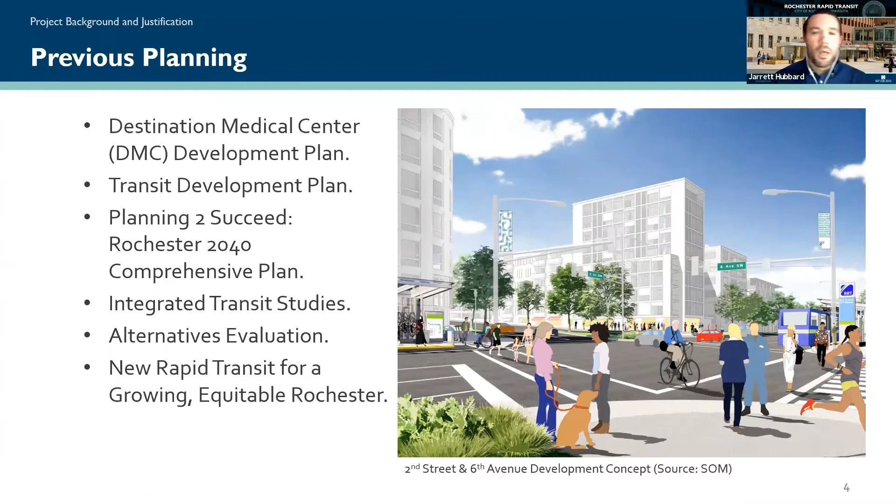Let's take a step back and look at what some of those documents, particularly the integrated transit study in 2016, 2017, and the DMC development plan from 2015, really showed about what would happen to downtown in our community as traffic and more employees started to come into downtown. We have to start with the idea that we're going to expect up to 30,000 new employees by 2040, and up to 4,000 to 5,000 new residents living in downtown.

So what does that mean and what does that look like in our downtown, in our community? Well, the first thing is, as we'll see later tonight, our streets will be congested with all these additional people trying to drive downtown, particularly in their single occupancy vehicles or personal vehicles.

One of the first things those documents outlined was we need to get people out of their personal vehicles and into other modes, with a heavy preference for public transit, but all other modes too. Additionally, if all those people are driving downtown, that means a lot of new parking spaces that would be expensive to design and build, and taking up valuable land downtown for people to park their cars during the day.

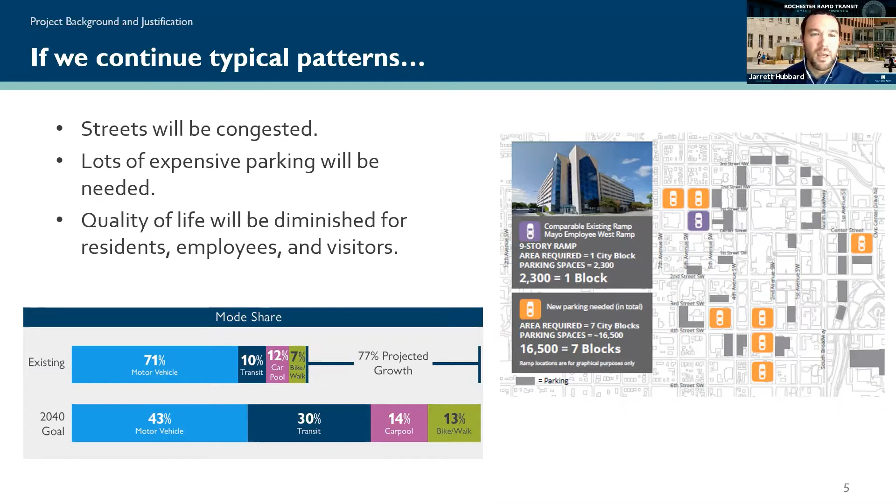And then finally, we can talk about quality of life in many different aspects of all this growth happening. Specifically, additional traffic and parking, where there would be limited parking for residents and patients trying to get downtown, find parking spaces, and move around downtown.

Back in late 2019, the Rochester City Council chose the mode of bus rapid transit, or BRT, as the primary mode to help bring individuals into downtown. What does bus rapid transit provide us? It provides a superior passenger experience with high frequency and high demand. It improves capacity, with larger buses that even with COVID restrictions could still carry up to 60 or 75 people per bus, helping with that switch of getting people out of their cars into other modes.

But we have to remember that transit and the development of Rochester Rapid Transit is just one element of trying to accommodate that growth and get additional people downtown. Additional things the city of Rochester is considering include looking at our parking policies and how we go about that.

That would include the development of even more parking and park-and-ride lots similar to the IBM lot further outside of town, and moving people via pedestrian or bike modes, such as developing the concept of City Loop.

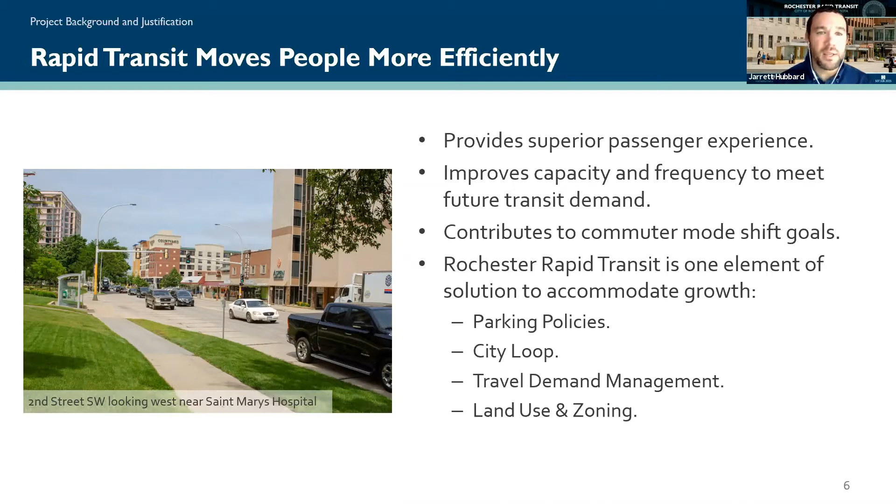So coming out of this, what do we get from bus rapid transit, or BRT? We get long-term investment in sustainable transportation. What we mean by this is, one, it's sustainable—we're talking about using electric vehicles—and two, as I mentioned, for over a decade now the city has been talking about trying to find additional ways to improve the level and types of transit offered.

Additionally, the permanence, or the ability to show that the route is stable and attractive, helps attract additional riders and will also attract additional economic development along the route. Really what I mean by this is development of platforms or stations more similar to what you see behind me downtown, or even more similar to the light rail transit you see in the Metro Twin Cities.

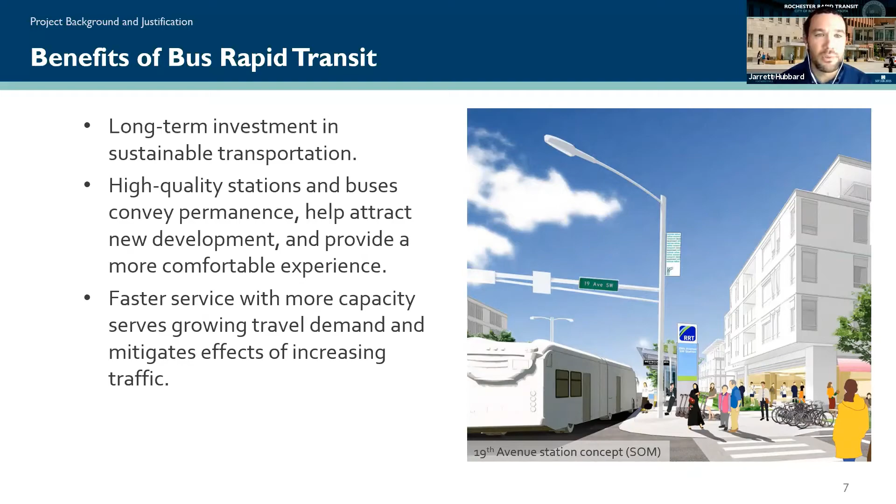Finally, we're talking about increasing service and capacity to help get those people into downtown. Once they're downtown, they can move more freely without having the need to get back to their car and move it from one parking structure to another. All right, let's move on.

Let's talk big picture about what the project includes. It is a 2.6 mile bus rapid transit system, or BRT line—we'll take a look at the map in a second. That includes 7 stations. We're also looking at the use of what are known as business access and transit lanes. I like to call them transit preferred lanes, because BAT lanes, for short, give preference to transit vehicles but will allow people to make right-hand turns out of them into driveways, accesses, and side streets, so they act as kind of a combo-type lane.

The project also includes the development of an enclosed, climate-controlled St. Mary's Transit Center, which would be across the street from St. Mary's along 2nd Street, and the development of a pedestrian tunnel underneath 2nd Street. As part of that tunnel, we would reconstruct 2nd Street from 11th to 16th Avenues, and we're looking at using 60-foot buses that have 3 doors and would be electric vehicles.

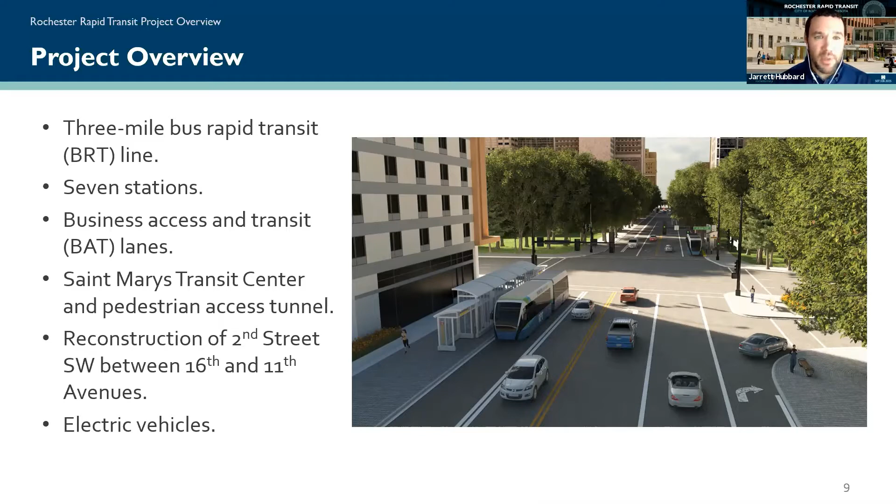So just real quickly, the type of service we're looking at: a bus would be coming to a station or platform every 5 minutes during the morning and evening rush hours, then every 10 to 15 minutes during the rest of the day and on weekends. It would take roughly 15 minutes to get from one end of the line to the other, with a low estimate of about 11,000 riders per day, with expanded service hours than we currently see with RPT neighborhood service.

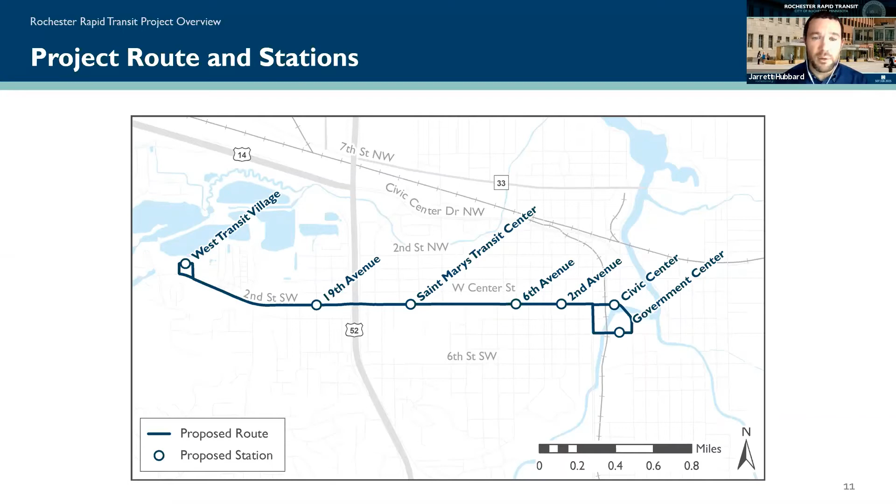Next is the map. As you can see, it stretches along 2nd Street. Starting on the west side, it would begin with what we're calling the West Transit Village, the location of Mayo's current west parking lot. Then you'd come down and stop at one of the 7 stations, or 6 stations after West Transit Village on 2nd Street, all the way to dead-ending at the Civic Center, then making a right-hand turn onto 3rd Avenue, followed by another right-hand turn onto 4th Street near the Government Center, followed by another right-hand turn on Broadway, and eventually a left-hand turn back on 2nd to come back out to the west. So with that, I'll pause and see if there's any questions.

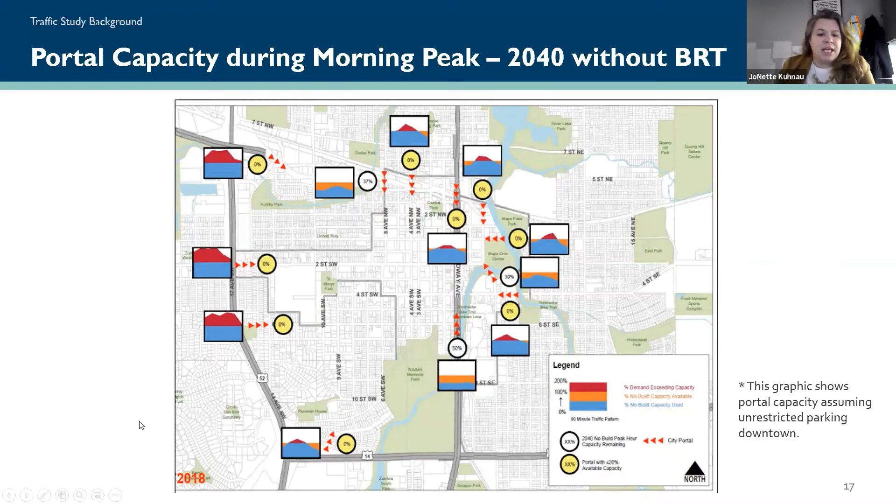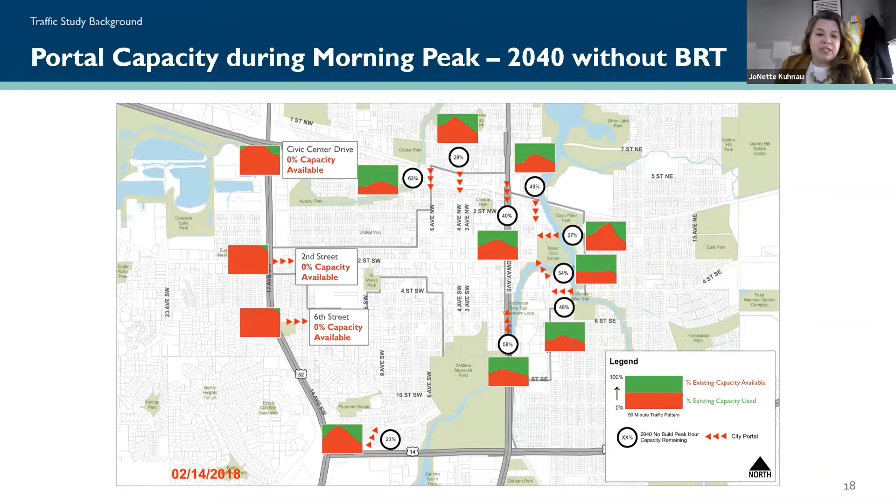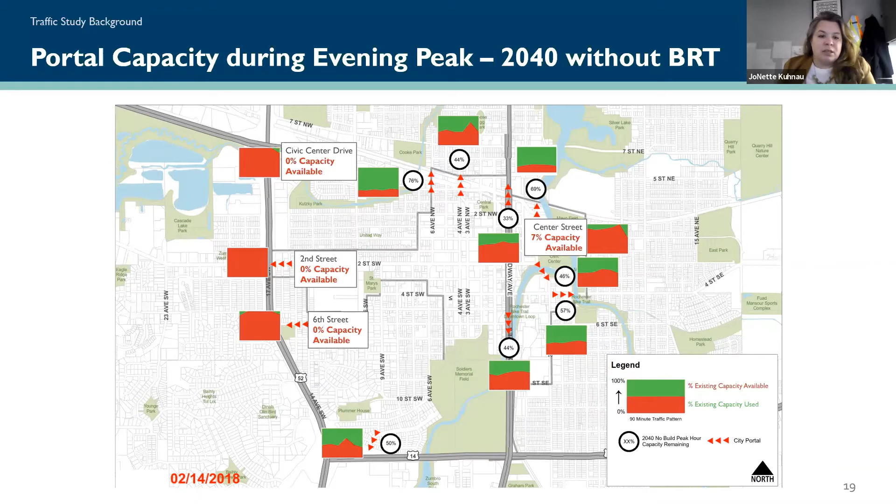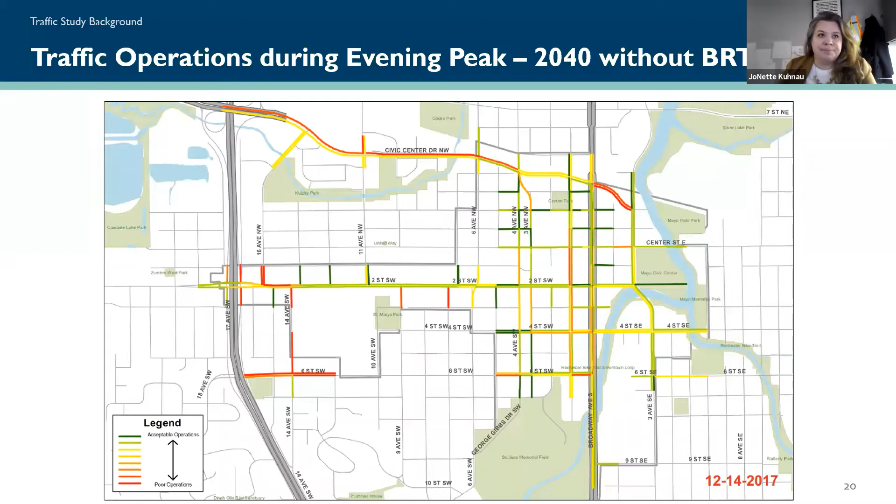So as we move into the current phase, the information I was just sharing was from the integrated transit studies in 2017, 2018. With this current traffic analysis, the purpose was to understand the effects of the proposed rapid transit project on the transportation system. That does two things: it informs the project design, resulting in modifications and refinements to make traffic flow better with the project.

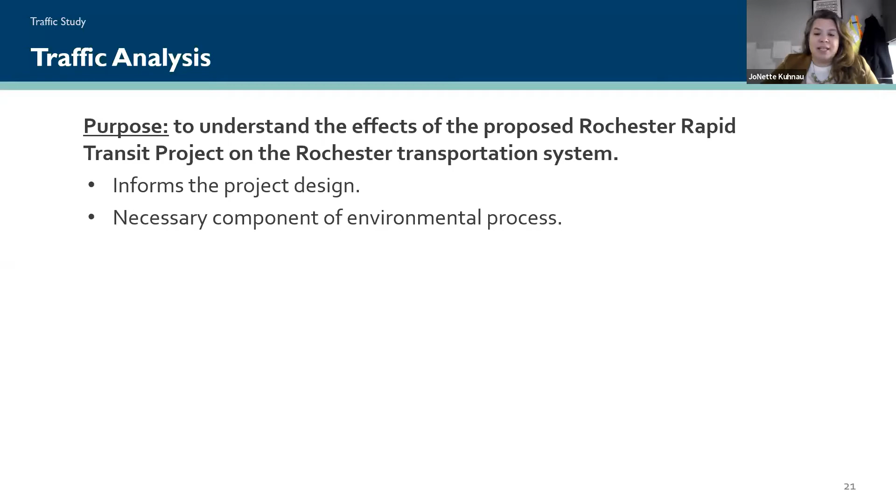And then it's about identifying and documenting any traffic impacts and deciding if there are any improvements that need to be made to mitigate those impacts. That is part of the environmental process that the project goes through.

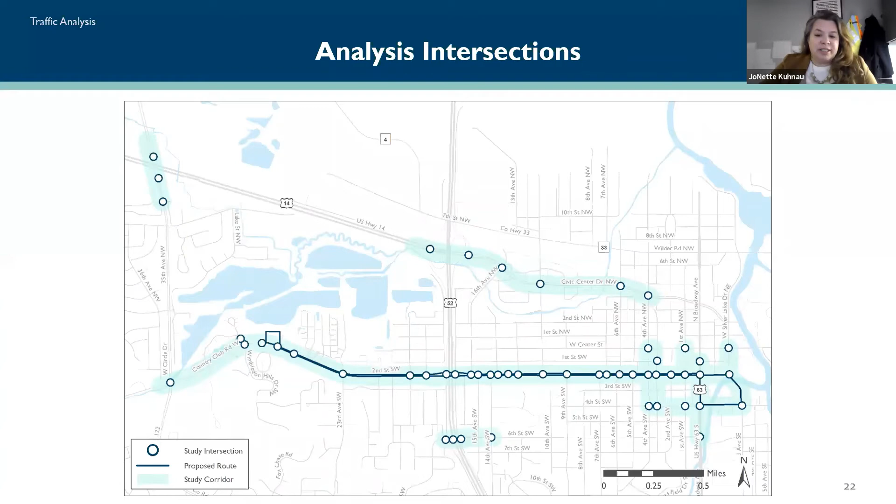In the process for the traffic modeling, we first start with existing conditions. That means existing traffic volumes, and in this case all of those were counted pre-COVID, so typical traffic conditions pre-2020. It's the existing roadway configuration—the lanes, the traffic signals, and the traffic signal timing that exists today. We use that to calibrate the model to those existing conditions so that as we use the same model to look at future conditions, it gives us confidence it's able to replicate real life.

So the next step is to look at projected 2045 traffic volumes, based on the forecast households, population, and employment. Those forecasts come from ROCOG, the MPO, and are consistent with their planning efforts for 2045 for that projected growth, as well as the improvements in the 2045 long-range transportation plan.

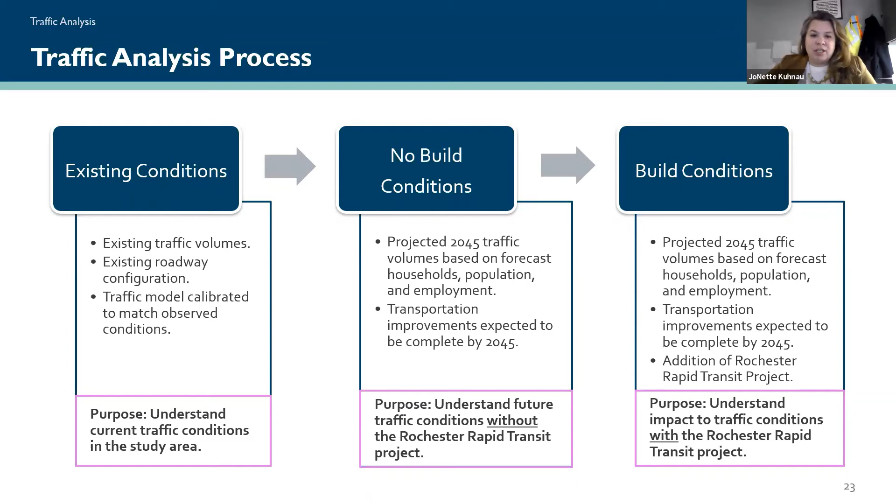As I mentioned on the previous slide, the future traffic volumes are based on that forecast growth, which is developed by the Rochester Olmsted Council of Governments. They have a travel demand model that uses those inputs - households, population, and employment are inputs, and then the traffic volumes are an output of that model. So what we're doing through this analysis is consistent with the larger planning for the region and what's included in the long-range transportation plan.

For the traffic analysis itself, we focus on the morning and afternoon peak periods, because those time periods have the highest traffic volumes. That allows us to identify the most significant impacts of the proposed project, so we look at the busiest times for traffic. The analysis uses a modeling software called VISSIM, which we use because it's very detailed and has the ability to model not only vehicles, but trucks, buses, pedestrians, and bicycles - giving us the best opportunity to model what real world conditions will look like.

As we run the scenarios, the model outputs tell us average delay for movements and intersections, which is how we assess the operations for traffic analysis - that delay measure. It also tells us about congestion and queuing and how that factors into the operations.

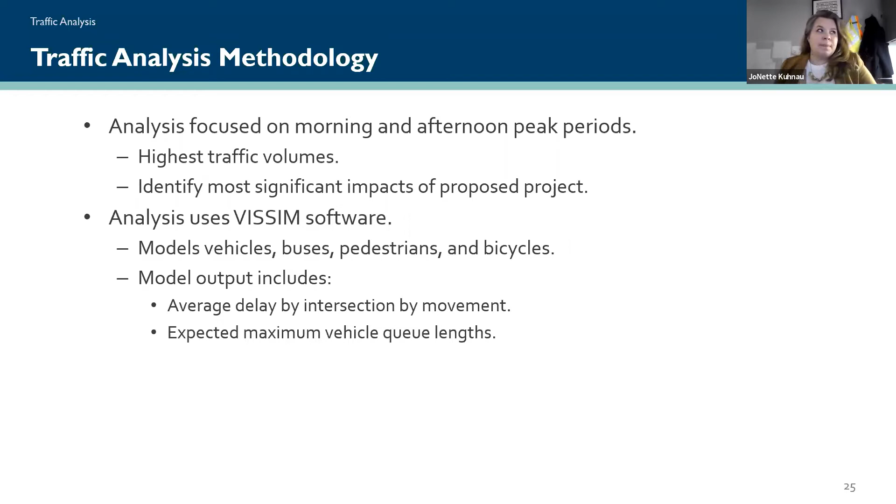The metric I mentioned, delay at intersections, is categorized as what we call level of service, which describes the quality of the experience related to that delay. It's kind of like grades in school - A is the best and F is the worst. A and B are very good, really uncongested. C and D are acceptable - starting to be busier, but acceptable operation for this type of area and analysis. E and F indicates there's a lot of congestion and the system really isn't operating very well.

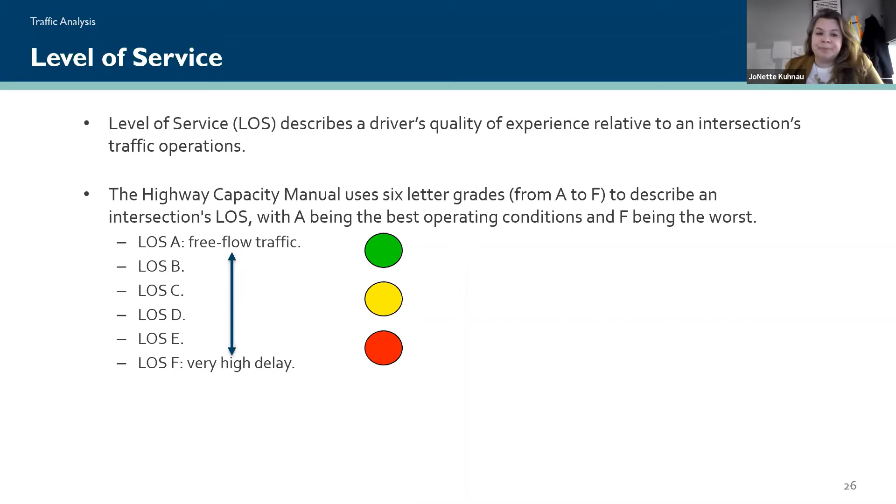Next we will go into the no build conditions, or the forecast of what things would look like without the project. One element that is part of the no build conditions is there is a 2,500 space parking ramp planned to be built by Mayo Clinic at the West Transit Village. This is part of the no build because it's a parking ramp and development that Mayo has committed to build even if the rapid transit project doesn't happen.

And so that's what we are reflecting. The early analysis of this alternative did show that for people to get in and out of the development and that parking facility, there do need to be two additional traffic signals on 2nd Street at the West Transit Village.

Another improvement included in the no build conditions is the expansion of Civic Center Drive from 4 lanes to 6 lanes. That's included because it's part of the long range transportation plan - the expectation is that it will be needed sometime between now and 2045, so it's included in the 2045 conditions. The timing of that and how that would happen is still to be determined. And just to reiterate, this scenario does not include the Rochester Rapid Transit project.

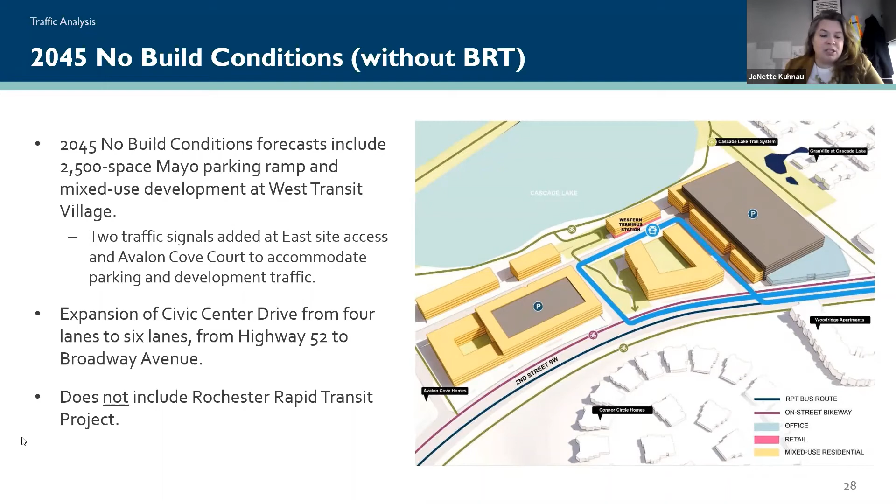As we go to the next segment at Highway 52, you'll see this is where we really start to see some congestion. Consistent with the previous work, we're seeing yellow and red at the interchange in the morning, where you see the red on the left half of the circle. That's saying people coming off of 52 to come onto 2nd Street is really congested and full. And in the afternoon, as you see the red on the right side of the circle at 52, at 16th, at 11th, and back at 6th, that's saying that whole segment is pretty congested all the way coming out of downtown back out to Highway 52.

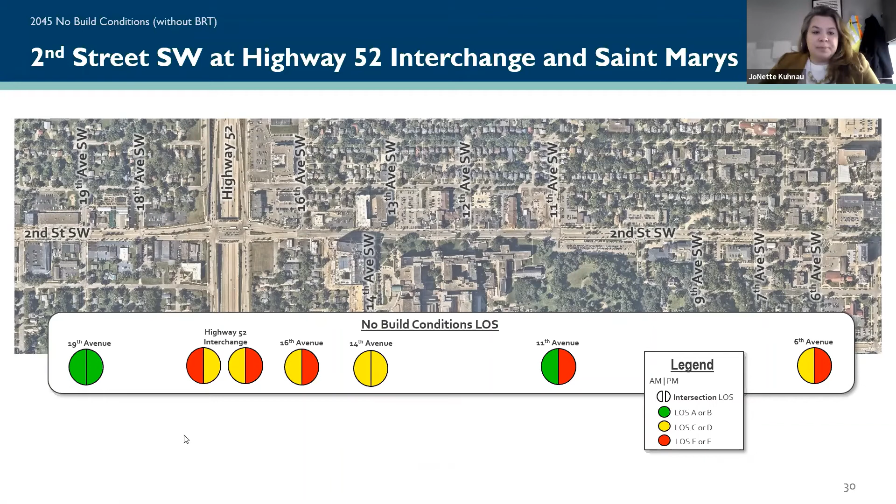The last segment is more the segment in downtown. As we get downtown, the traffic volumes are a little bit lower because they're more distributed into the street grid, onto a number of different streets. So you do see the red there in the afternoon at 4th Avenue, which is the circle on the left. And then through the rest of downtown, the operations are green or yellow, so we would consider those to be acceptable.

One thing, while we're talking about this scenario, I mentioned in the summary, there are some improvements that will be needed, and Civic Center Drive is certainly one of them.

One of the others is the intersection at 6th Street and 14th Avenue, that's a location that has stop signs on all the approaches today. And we do expect to see traffic on 6th Street increase. So 6th Street and 14th Avenue is another location that, sometime between now and 2045, is going to be at capacity and potentially need some improvements. That would be an improvement project that would need to be pursued separately from this rapid transit project.

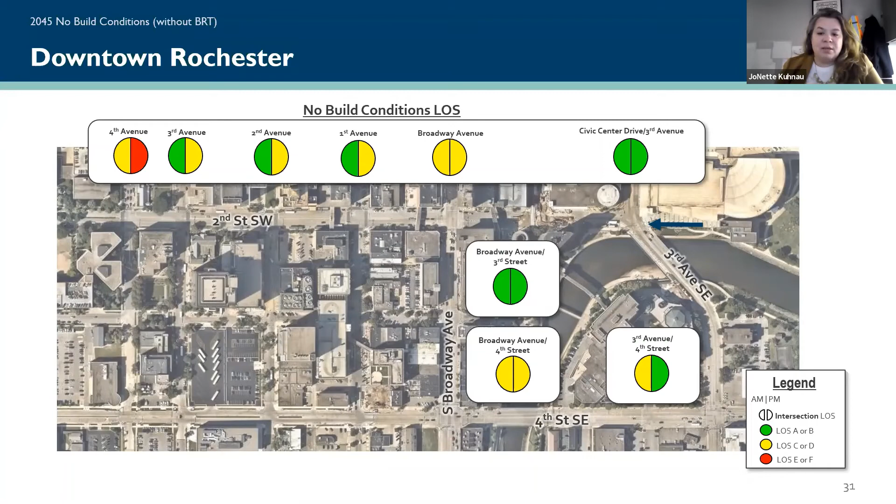So next, we'll talk a little bit about the build conditions, or those 2045 conditions with the rapid transit project. As Jarrett showed earlier, the route runs from the West Transit Village on the west end of 2nd Street through downtown on 2nd Street, and then does a loop by Civic Center area, the Government Center, and on Broadway.

On this map, the yellow segments are where the bus rapid transit would operate in lanes with mixed traffic. So there is not a preferred transit lane or a BAT lane in those yellow segments. And then the blue would have the outside lanes on 2nd Street that are the BAT lanes, or the business access and transit lanes.

The analysis does assume that signal priority is provided on 2nd Street. What that means is the signal timing has the ability to make slight adjustments to help those buses move through the corridor. So rather than just missing the end of the green and sitting there until the signal cycles around, it's giving them a little bit of a bonus green time to get through the intersection.

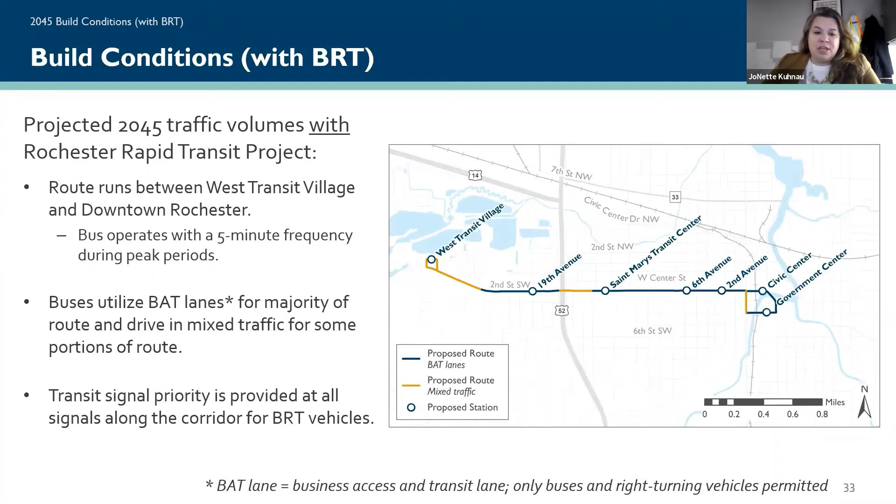So in this scenario with the transit, the BAT lanes on portions of 2nd Street, the forecasting did show that small volumes of traffic would shift from 2nd Street to Civic Center Drive, 6th Street, and other parallel streets. And when I say small volume, even during the busiest traffic times, that shift was less than 2 vehicles per minute total. So that actually would be a volume that would be hard to observe, to notice the difference. And on the residential streets, it would be less than 1 vehicle per minute.

So overall, that number is very small, but the forecast model does suggest that there would be some traffic that would look for other routes besides 2nd Street. Again, not a lot.

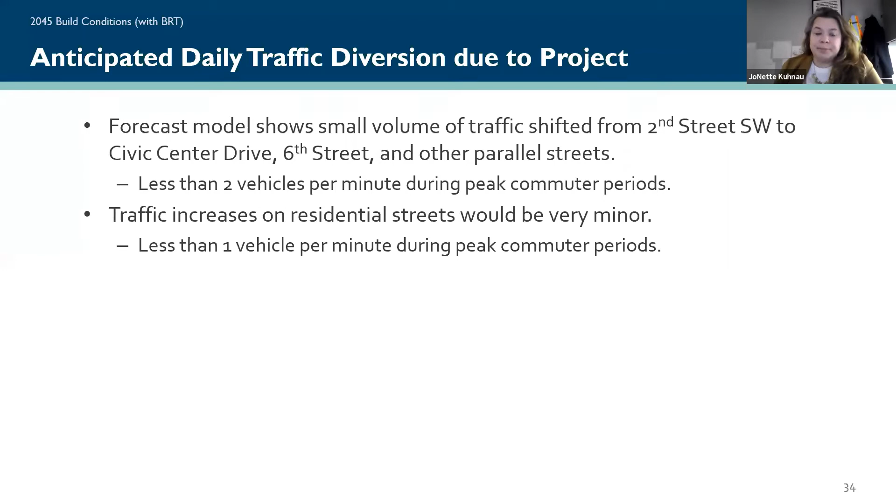So then we're going to walk through these similar looking graphics. Starting on the west side at West Circle Drive, you're seeing these intersections are green and yellow. They were also green and yellow in the no build conditions. So when we're comparing the two scenarios, we're not just looking at whether the color changed. We're most specifically looking at did the project cause an intersection to go from operating acceptably to unacceptable? So did it go from green or yellow to red? Because we would consider that to be an impact that would need to be mitigated, or there would need to be improvement. So in this segment, the intersections were green or yellow, and they're still showing green or yellow.

And these operations are for vehicle traffic, that's what this is representing. And it does include the BAT lanes that start at 23rd Avenue and then extend to Highway 52.

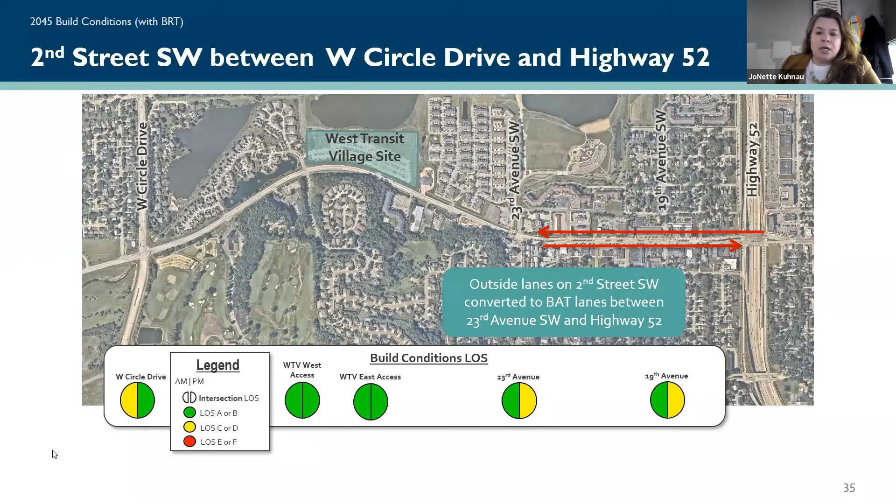So this was a design modification that the project made that made traffic work better.

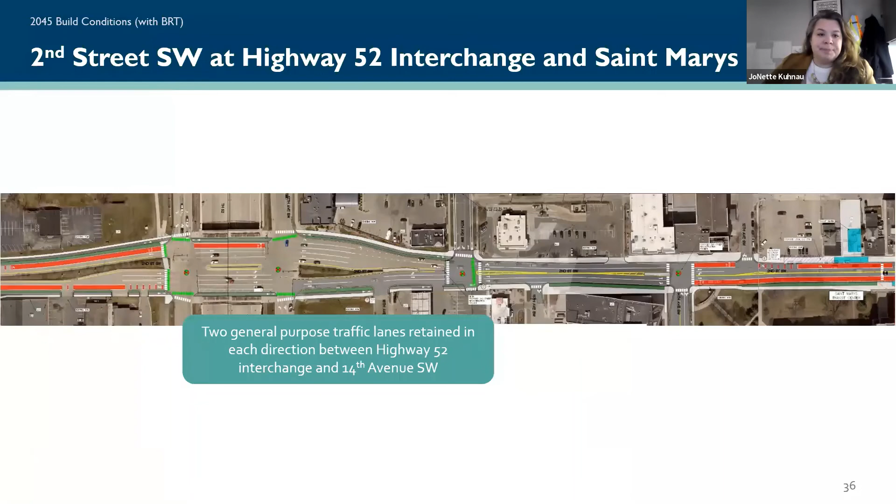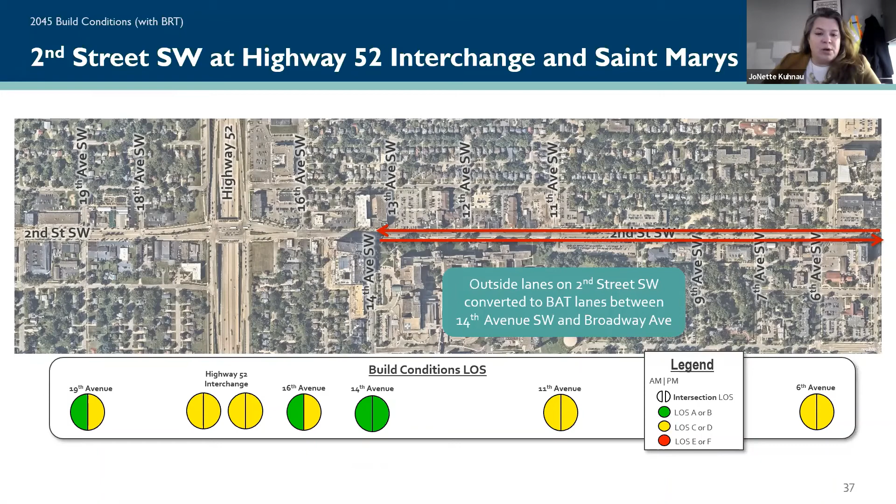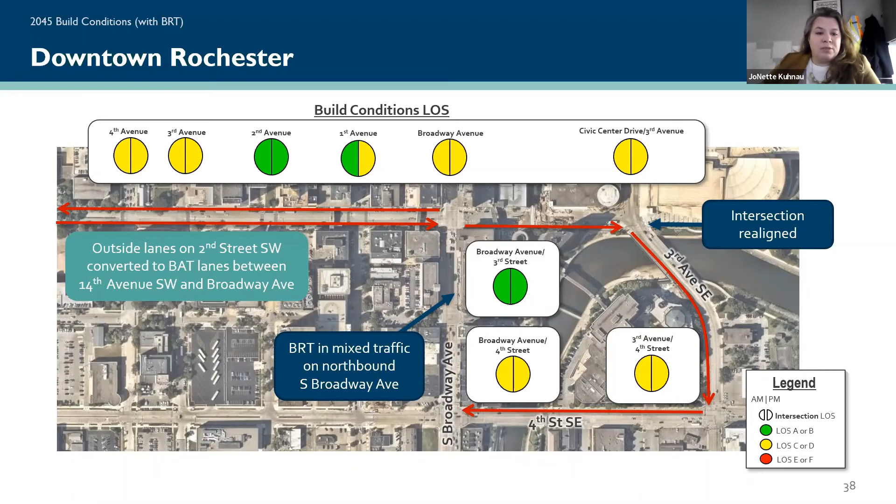I know that was a lot of slides and information, but just to summarize the key points: if we don't do anything, future traffic volumes will exceed the ability of the transportation network to handle those volumes, particularly during those commuter AM and PM peak periods. With those increases in traffic, it will be more difficult to turn from some of those residential streets onto 2nd Street because it will be busier. Commuter mode shift from single occupant vehicles to transit is needed to accommodate that growth because the transportation system won't work if the majority of people continue to drive into downtown.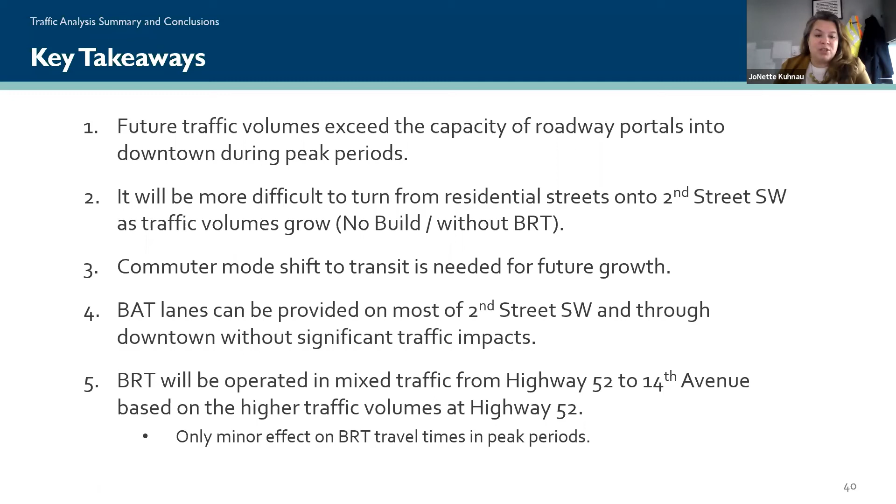The more recent analysis done for this project showed that BAT lanes can be provided on most of 2nd Street and don't have significant traffic impacts. Where we saw that the BAT lanes would have significant impacts, which was the Highway 52 to 14th Avenue segment, that's where now we're showing that the BRT would be in general purpose traffic lanes. Again, that was a significant improvement for traffic and did not significantly impact the BRT efficiency, so that was a good trade-off.

Left turn lanes have been incorporated into the project at key locations based on the analysis, so 2 of those locations were at 14th Avenue and 11th Avenue on 2nd Street. The modeling suggests there will be small amounts of traffic that shift from 2nd Street to other streets. Based on the magnitude of those shifts, we don't expect those to be significant on either some of the larger streets or on the residential streets.

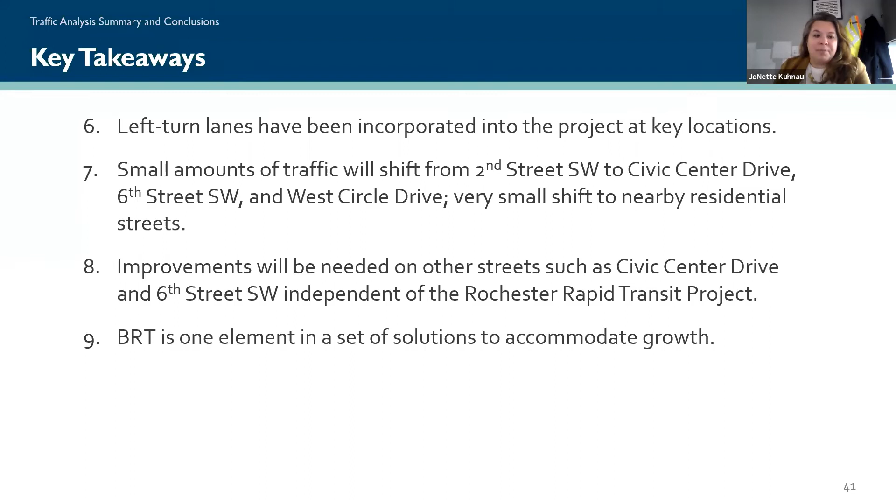There will be improvements that will still be needed on other streets, such as Civic Center Drive and 6th Street. Those aren't caused by the rapid transit project; they're things that'll continue or need to be planned over the next period, between now and 2045. BRT is just one element in a set of solutions, and the rapid transit project is one element of a much larger transit system that will help people move into downtown for those jobs in downtown Rochester.